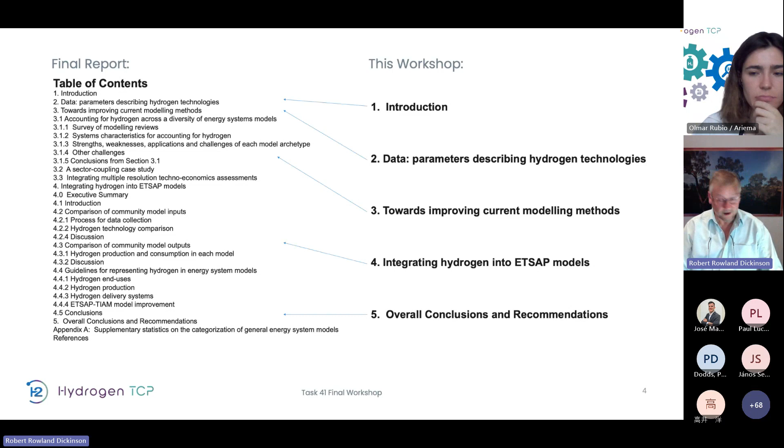I've got one slide to recap. What's been really interesting is that regardless of the original motive for Task 41, what we've actually observed is a very steep ramp in interest in modeling to do with hydrogen over the duration of 2018, 2019 to now. And it's not just academic modeling in the journals, it's also things like Electrify Everything in the US and Australia, and probably elsewhere too.

Hydrogen was integrated into Plexos in 2020, right in the middle of Task 41. Plexos is a major modeling tool by Energy Exemplar, used around the world. So we can't take credit for the increasing modeling interest, because it's happening anyway. In some ways we ended up having a hard time keeping up, given there wasn't enough work on modeling.

So just to recap the context, Paul already mentioned Task 38, which was Power to X, went from fringe to mainstream over the course of Task 38. It was quite similar to Task 41. So the notion of modeling hydrogen went from fringe in 2018 to becoming mainstream by about now.

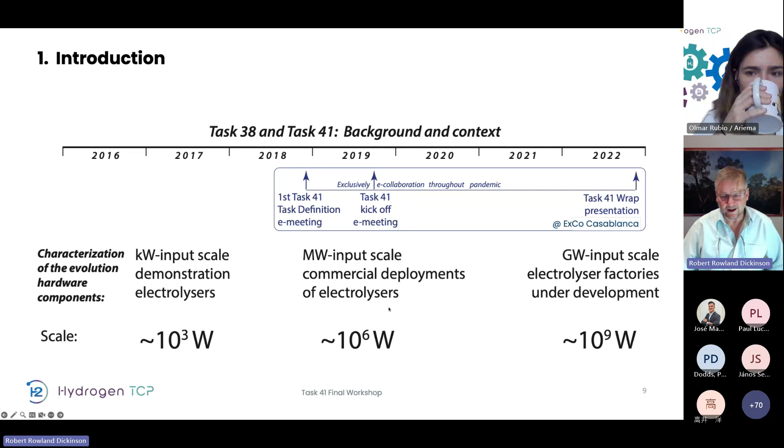Another way of characterizing it is in terms of the scale of typical electrolyzers. 1 megawatt is still the largest electrolyzer around Australia, which is in here somewhere, but they've been around for a long time. Megawatt scale is coming and gigawatt scale is just around the corner.

Another characterization of the Task 38, Task 41 context is IEA Hydrogen, the International Energy Agency, where the Hydrogen TCP and etc. TCPs sit underneath the IEA. They started getting seriously interested in hydrogen for the G20 in 2019, and then they started an annual global hydrogen review, which is now a major project reviewed by people all over the world.

So, just to recap quickly: Subtask A was about data consolidation. Subtask B was about improving current methods. And C is what Paul is going to be talking about.

I guess we'll do questions at the end. D was a review of reports from IEA, but really that was just a relatively small chunk of work where the IEA was doing their own reports involving hydrogen, led by Ali Lind, who was the task leader at that time. We provided some input to IEA's reports. So we made good strides, but we didn't get there in the end.

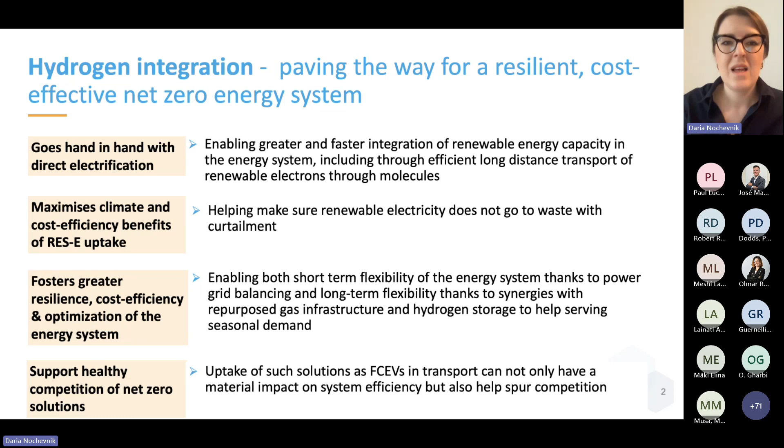Within the Hydrogen Council, we have undertaken work on modeling hydrogen integration in the energy system together with our colleagues and partners at Baringa. We used Plexos as the modeling tool, and we looked at three distinct regions with very different energy systems: Central Western Europe, Japan, and Texas in the US.

What we have aimed at doing is really to assess and quantify the impacts of hydrogen energy penetration across power, gas, and liquid fuels, using the latest iteration of Plexos that allows you to explore synergies between those three elements of the value chain in an integrated manner.

The insights I shared earlier are very much confirmed by this modeling and the analysis we have carried out across the three regions. We see that both energy efficiency, cost efficiency, and climate benefits are associated with greater integration and unconstrained performance, availability, and the opportunities associated with effectively letting hydrogen solutions such as electrolyzers be integrated in the system in an unconstrained manner where they're able to follow market signals, and that can unlock substantial benefits.

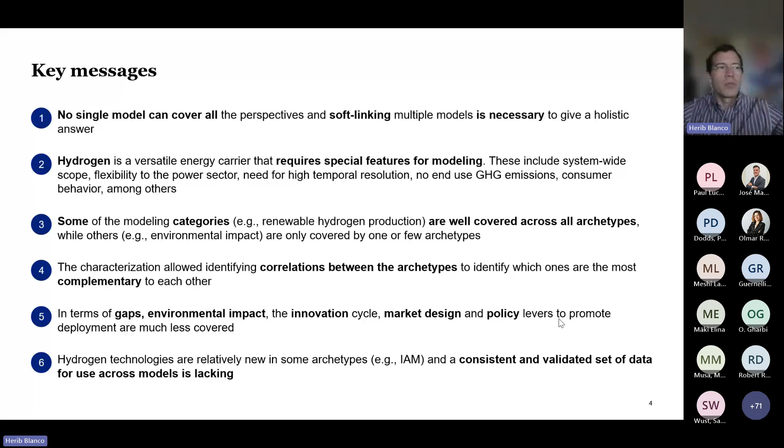So the longer version, again similar to what I explained, but giving more details. This is a taxonomy for any energy model. For this one, we reviewed almost 30 articles, a total of 127 categories, which we clustered into these six majors that you see. I'll guide you quickly through each.

One way to look at a model is its purpose. You could look at a normative scenario - what do you need to do to reach net zero in 2050? Or you could look at it in a forecasting or exploratory way, starting from today - what happens if I increase the carbon price to X, as an example. So, exploratory. But the main point is that depending on the purpose of the model, that already gives you a difference between one another.

The other is solution methods, around the analytical approach - for example, if it's top-down, meaning you start from the macroeconomy and then try to model the technologies, or bottom-up, where you have very rich technology detail but not so much of the macroeconomy. That's an analytical approach. Mathematical approach is just whether you have optimization, simulation, system dynamics - there are different types, and they lead to different answers and different insights. So that's another way of slicing and differentiating the models.

Use and accessibility is just because of the trend - well, not so recent anymore - of open modeling. So it's about whether it has transparency, licensing, and training.

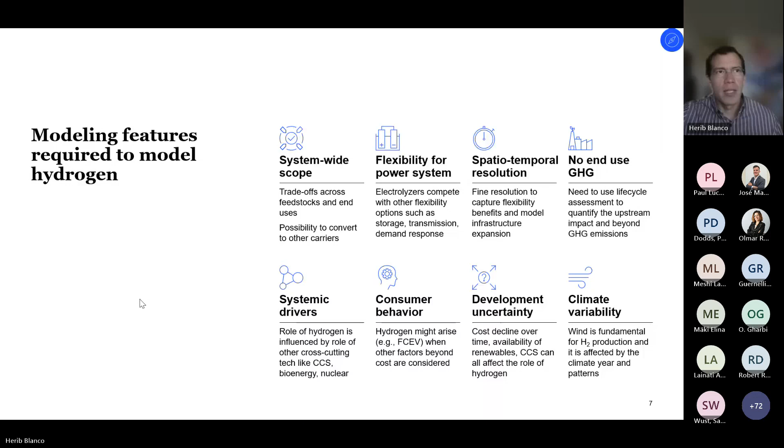And climate variability - at the end, one of the core technologies for hydrogen is the renewable pathway. Wind is there, and wind depends on the climatic year that you take. It can vary a lot from one year to the next. So that's another feature.

This leads me to adapting the taxonomy that we saw before to hydrogen would leave this.

One is spatial temporal resolution, key for hydrogen because of the flexibility in the temporal aspect, but also the spatial aspect. On one hand, you need high spatial resolution for the renewables potential to know where those renewables are located. The same for the infrastructure. You need high spatial resolution, so that's the reason to have that as a key category in the taxonomy.

Model topology, because of what I mentioned for the hydrogen derivatives and end uses, that's key because you only unlock the full potential of hydrogen when you consider the hydrogen derivatives. Those derivatives are the ones being traded, and trade is a relatively big part of the hydrogen potential. So that's important, the importance of the model topology.

Complexity - I think I already mentioned all those aspects. So it's important to have those to look beyond cost optimization.

Perhaps another angle I haven't mentioned is that part of the complexity, again going beyond cost optimization in trades, is geopolitics. You will not look at country X just because of the cost and export potential or even the land area. When you look at country X, it depends on the industrialization, the political stability, the renewable development, and so on. So my point is that's something that goes in this complexity category as a way to characterize models and the methodology.

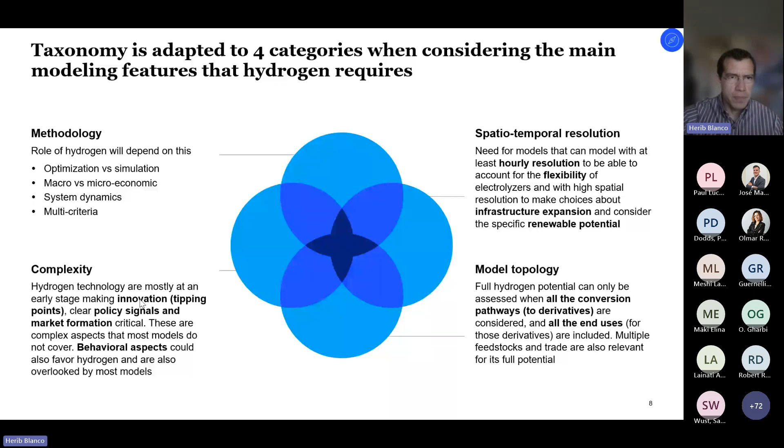So looking at the archetypes for hydrogen, we identified 9. We had more archetypes, but we narrowed it down to these 9 core archetypes. Let me guide you briefly through them.

Starting, the way to see this is, I would say, kind of Venn diagrams is what we try to show here. The smallest one is if you look only at one electrolyzer, one renewable plant, and try to optimize the size of those. That's what we call here VRE integration, so just very small scope.

Then you could expand that to the entire power system, include some other generators beyond wind and solar, the demand beyond electrolysis, and then you have a power model. But that has a limitation of relatively simple representation of other sectors, even when you see Plexos and the new Plexos with gas, it has very limited scope for transport, for example, for aviation, for shipping.

So it's still limited. Then you could expand it to an energy system model, including the other sectors, but then you start making trade-offs related to the question that was posed in the chat. The trade-off there is you expand the scope and cover more end uses, but you probably have to compromise a bit the temporal resolution because then you have a wider set of technologies.

There are energy system models that have hourly resolution and cover all the sectors, but then you might compromise on, if you're doing operational optimization or capacity expansion, for example, the geographical scope or geographical resolution. You could expand further scope and do integrated assessment models, so include things like the carbon balance, the climate, land use. That's a wider scope, but then again, those have even coarser resolution, and you might have issues of modeling seasonal storage, for example, which is one of the business models for hydrogen.

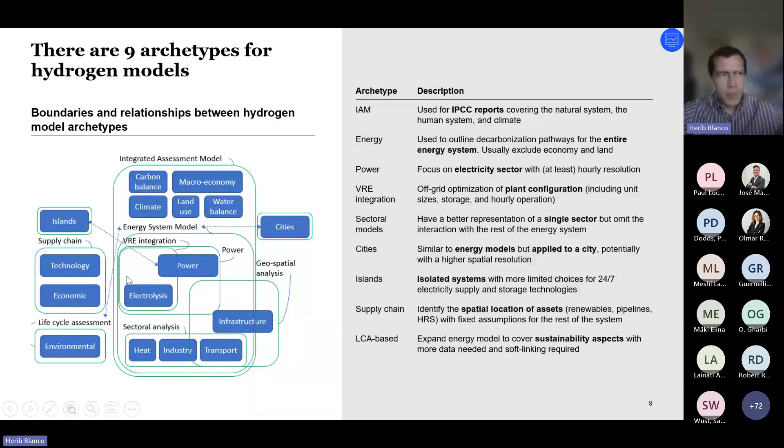I'll take probably like 5 more minutes, and I think I'm still on time, but let me know if that's not the case.

Here it's kind of an overview of part of those trade-offs that I mentioned and advantages and challenges of each one. So integrated assessment models are the ones used for IPCC. There historically has been a lack in the role of hydrogen there, just because of the update cycle. And even in the recent AR6, the role of hydrogen is still smaller than from other international organizations. So there the advantage is, yeah, it covers everything, but because of this update cycle, it doesn't consider many of these end uses, and not all of them.

And again, particularly for the derivatives and trades, to unlock the full hydrogen potential. For energy, I already mentioned the trade-off of temporal spatial resolution because it's expanding in the scope. For power, the advantage is that it captures the flexibility, but the disadvantage is that it's focused on power, so you're missing the rest, and hydrogen needs the rest. It's a cross-cutting energy carrier.

Perhaps not to go through each of these. Another important one is perhaps the last one, the environmental analysis, just because that's a community where there are lots of studies looking at the LCA impact, but not many with the integration. And there, something key is the inventory for the environmental impact assessment, and having consistency with the energy model. So for example, part of the inventory is electricity use and what's the footprint for the electricity use, even for example, for the concrete that you use in the electrolyzer, that's called background.

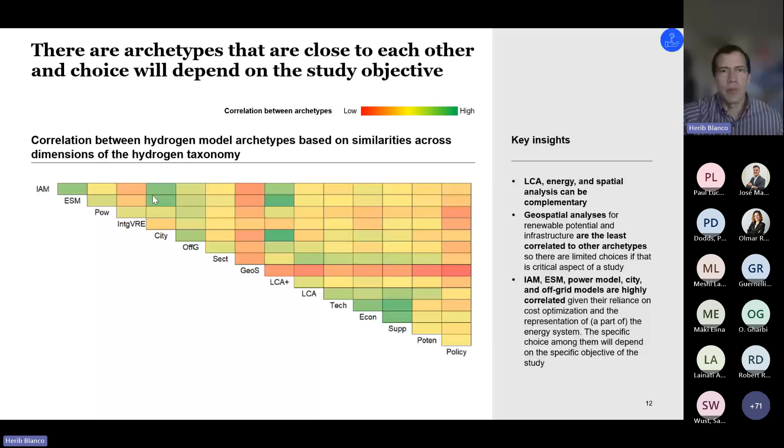And the last one is just to mention that this was a team effort, so thanks to all the team. I think I saw a couple in the call. I was the lead author, but by no means the only one. So just to thank the entire team for the contribution. Thank you.

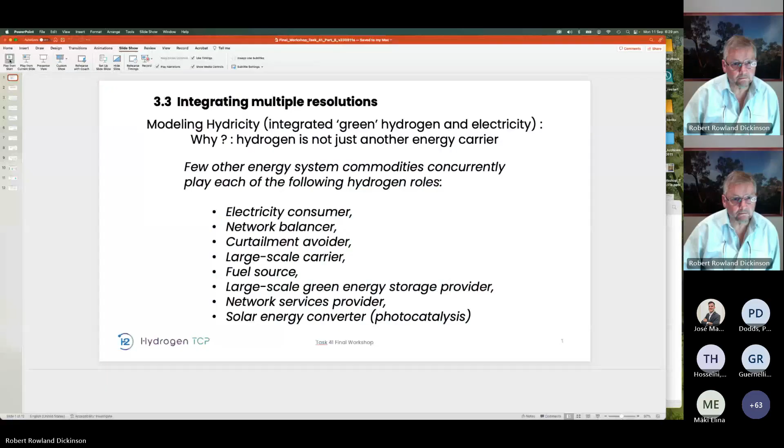Yeah, thanks, Herib. I'm going to go fairly quickly through these because we're a little bit late on time after many presentations. But all of this is in the final report, so if you want to look it up and send me an email if you have any questions, that'd be cool.

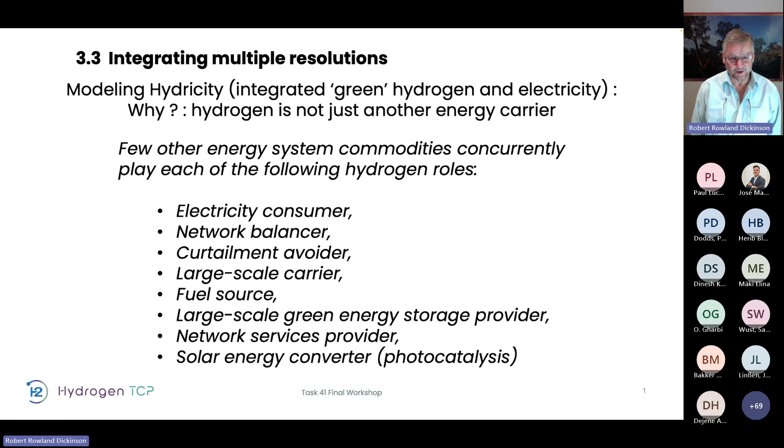So I use the word hydricity to refer to integrated green hydrogen and electricity. And why hydrogen? It's not just another energy carrier, it's all sorts of other things - an electricity consumer, network balancer, curtailment avoider, as our Indian colleague pointed out just now in the chat, a large scale carrier, a fuel source in the sense of providing fuel to fuel-consuming services, and so on.

But as one of the things that Herib pointed out is the need for a soft coupling of different systems - that's one way of putting it, but I'll be referring to that at the very end of this short presentation. So ideally, it gets interesting to look at dispatch interval time resolution while maintaining computational tractability. So I reckon we can have our cake and eat it too.

What happened? So picking on South Australia as a region with a capital R within Australia's national electricity market. It's where I live, but it's not why I'm presenting it here.

I'm presenting it here because it's the world's best example yet of a market that is already suffering from - if you like to put it that way - or benefiting from, if you like to put it the other way, very high proportions of variable renewable energy, so wind and solar. This is what's happened in the last decade - it's getting close to providing enough wind and solar, actually to backtrack a little, the state government wants to get up to about 500% variable renewable energy by 2050 and sort of 200% in the 2030s.

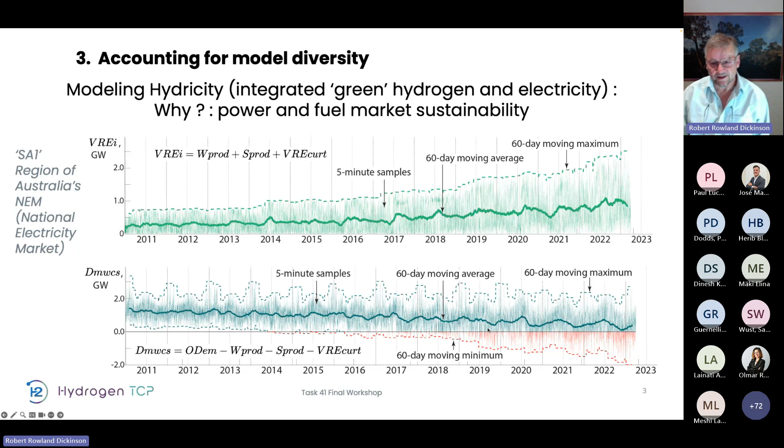So demand minus wind and solar, the bottom graph here presents the interaction of both demand and wind and solar production. As you can see, we're getting more and more negative values - that's very low demand in sync with very high varying production.

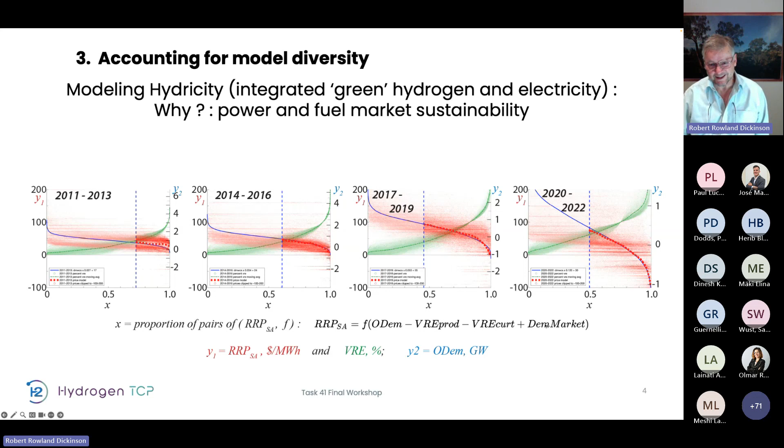So the question I posed is: can you model price as a function of all these different complex things? And the answer is yes. Over a 3-year period, obviously it changes over the long term, but over any 3-year period there's a good shape match between regional reference price, RRP, and all of these other 4 independent variables: demand, production (that's wind and solar production), curtailment, and eventually demand market - that's where we get particularly interesting.

If you look at the history of demand modeling and price modeling, until 2010 there was no significant wind and solar production, so RRP was a clear modelable function of demand. Then it became increasingly dependent on varying production in the early 2010s, and then production plus curtailment in the late 2010s. The extension of that is: can we add a demand market to operational demand?

So demand market means any energy consuming service that is able to respond to price, to buy or bid into the low price markets. The obvious one is electrolysis.

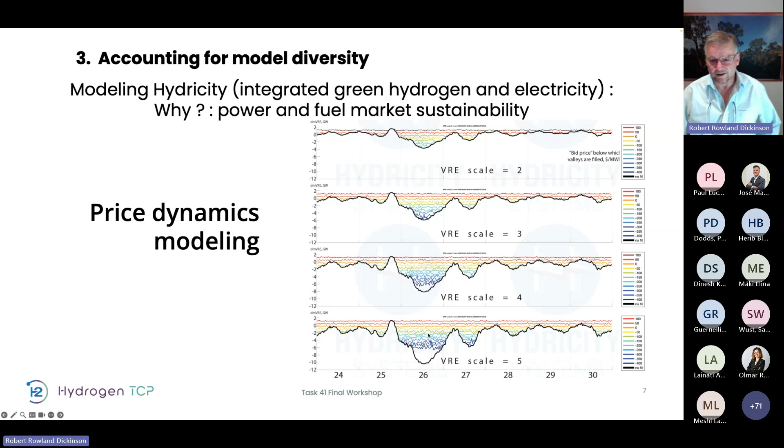So yeah, this just works. Obviously things fall over if you've got nothing but negative prices. But if you fill all these negative - from top to bottom this is scaling, you could think of this as 2028, 2032, and all the way down to 2050, and everything else is the same - you've got increasing opportunity to buy or to bid, if you like. This is the price at which these energy consuming services are buying electricity.

So this is the crux of it. Price dynamics modeling clearly shows that anything below 0 is obviously not sustainable - the energy system, the market falls over. So there's no free lunch. You need to have a bidding process to push all these prices up, and then everybody wins if you have a bidding process.

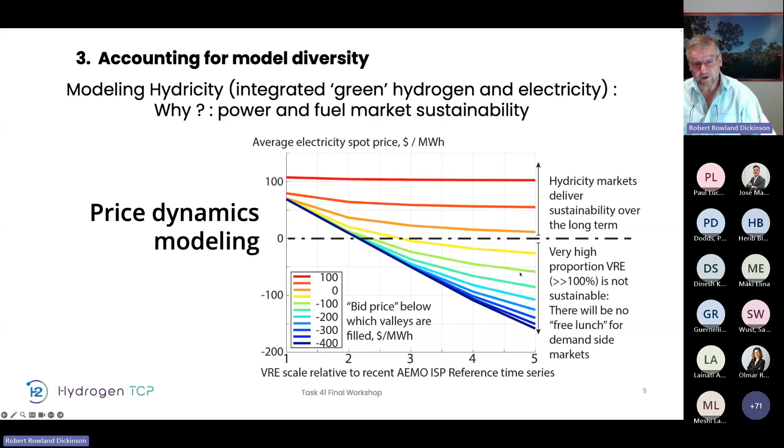This is why I'm alluding to a 10-year period - we're roughly here right now, 2030s in here, or 2032 in here. So roughly a 10-year transition period, where the history of electricity markets around the world - most of the people I saw in the attendee list are from Europe, obviously some from India as well, which is cool.

But everywhere around the world, probably India as well, the bids are stacked in order of lowest dispatch first and highest last. So if you're a coal plant, you always bid at the lowest price because you know you get in no matter what the price ends up being. But if you're a high price bidder, you can choose not to go in too low.

And it's the other way around - if your bids are stacked in order of highest dispatch to lowest last, if at all, then the demand side is being taken care of by balancing out all of these things. So for me it's fundamentally obvious that that's the way we're going to go. You can think of it as fuel to power and power to fuel. It's fundamentally obvious that as we go from fuel to power, where the fundamental cost of electricity is fuel, here the fundamental cost of fuel is power, and we need to flip things around.

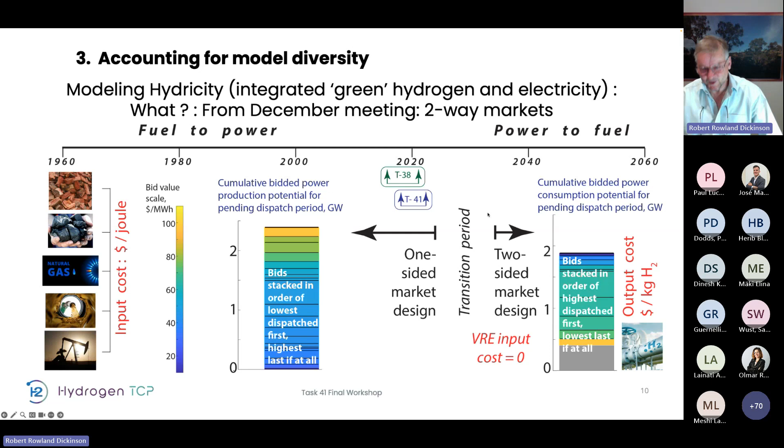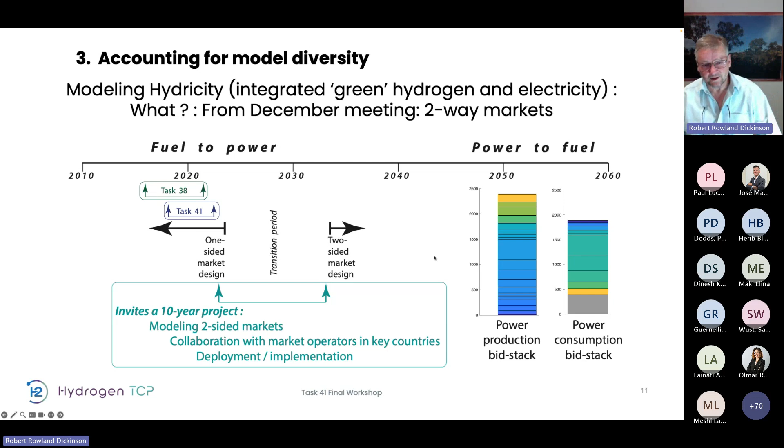So I just suggested that it screams out for me to have a 10-year modeling project where we start out modeling - you don't actually implement it yet, but start modeling two sides, a power production stack and a power consumption stack running side by side, and that's not rocket science.

So yeah, once you have that - all of that was based on 5-minute time steps. This top row here is 5-minute time steps, 5, 10, 15, and these are decades or whatever it happens to be, like the model that Paul's going to be talking about in a moment, or anything that has a decade or a 1-year timestep. It shouldn't be too hard to arrange to have the benefits of 2 or 3 modeling systems at once.

So I got a bit of a break here, but maybe Olmar, do you want to do a break or do I go straight into Paul?

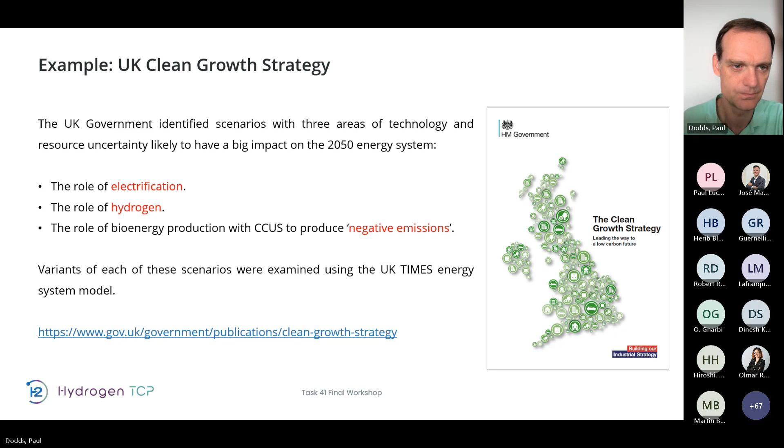Now, these models are useful because they represent many supply chains. We start off from resources on the left, we end up with energy service demands on the right-hand side. We have a number of different technologies in the middle that process primary commodities into secondary commodities, so gas into electricity, for example. And then we deliver those, whether it's through wires or pipes or by road.

We have a series of different demand technologies in different sectors, and these models cover the whole economy, which is really important, to try to cover all emissions across the whole economy for energy. So your demand technologies might be lights, boilers, cars, and such like, that meet actual demands for things that we want in real life. Now, this is a very simplistic diagram.

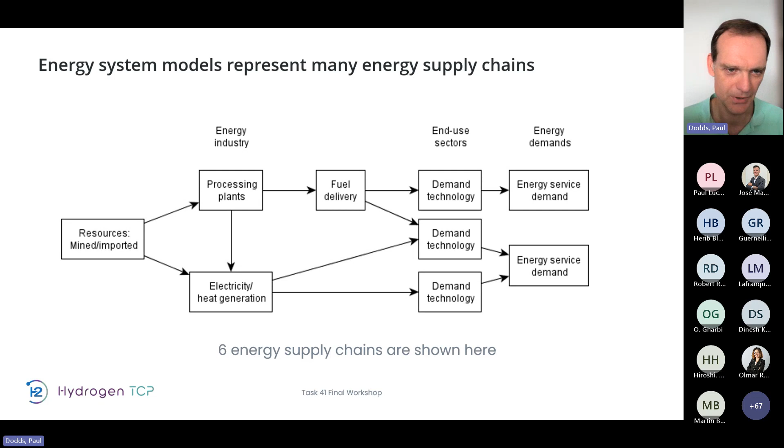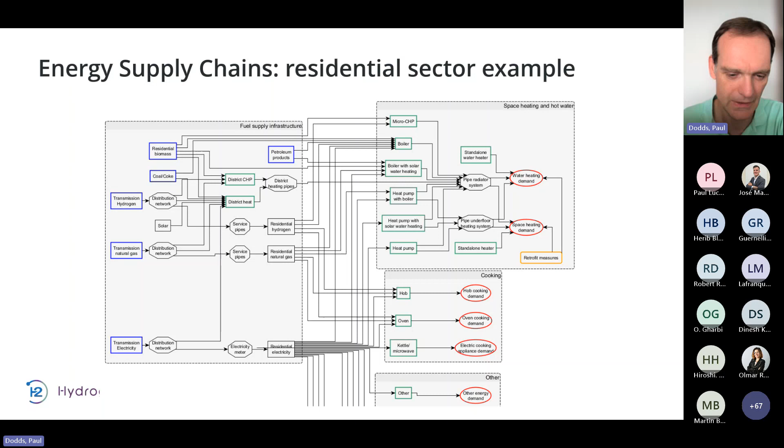In practice, this is also a simplified diagram for the residential sector. You'll see that we have a lot more technologies represented here, and we have infrastructure as well as energy production and energy consumption and demands.

And then once we get into the whole model, it becomes really complicated. In a typical model, you might easily have 1,000 different technologies represented, say a few hundred commodities of different types, in order to meet say 50 demands across the economy, while counting all greenhouse gas emissions and minimizing them over time.

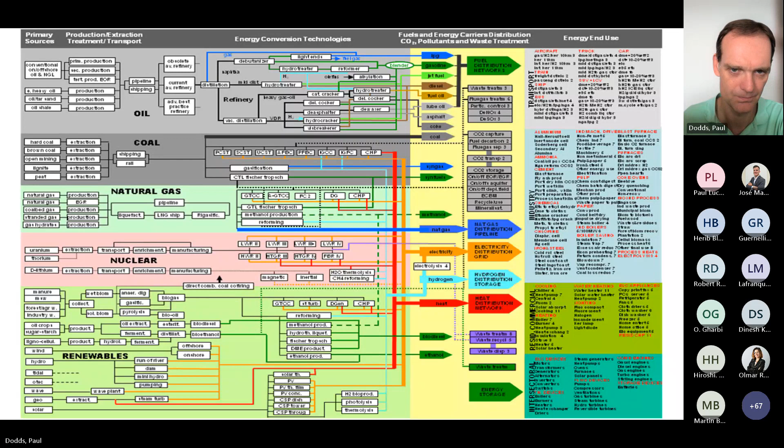So I want to just mention why we did this project in the first place. There was a question we had, which is why was there so much variation in the use of hydrogen between our energy system models? We had concern within the ETSAP community. ETSAP is the Energy Technology Systems Analysis Program, which is another IEA technology collaboration program. We had concern within the ETSAP modeling community that there was quite wide variations in both hydrogen supply and demand between the various models that people were using.

And many people have different national models in particular. We didn't know why this was. We didn't know how large the variations were, because nobody had ever really looked. This was just something that was more like hearsay.

Now, if there was variations, and we assumed that there was, based on conversations we had, we didn't know if these were caused by local variations. So simply the local energy systems are different, the types of demands are different, the resources are different, and therefore it made sense to have use hydrogen in some places and other approaches in others. So that would be very normal, very proper thing to do.

Or was it because some or all of the models didn't represent hydrogen properly? In which case that was an issue with our modeling rather than an issue caused by the real world, local variations in the real world. And that would be a big issue that we'd need to deal with in our models.

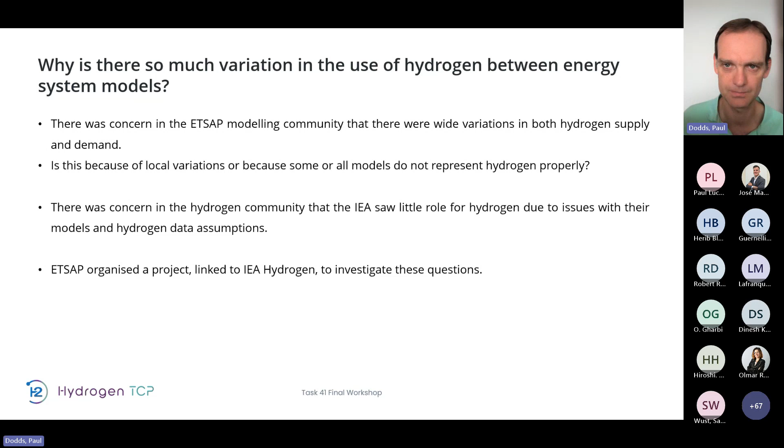So in our discussion today, I've just introduced energy system models, and I'm going to talk about the comparison of model inputs we did, which was a survey that took place in 2019. I think now that we're in 2023, that's an important thing to say, because many of these models have improved their modeling of hydrogen since. So I certainly don't want you to take this as the current status of all of these models. Some have changed since 2019 - some will have changed a lot, some a little bit, and some not at all.

We'll also, I'm then going to talk about model outputs, which we also did a survey for at the end of 2019 into early 2020. And then I'm going to finish by talking about making some suggestions for best practice modeling of hydrogen going forwards in these models.

So the first step was to look at model inputs. How do we represent hydrogen energy systems in existing models? And what are the strengths and weaknesses?

We asked each modeling team to fill in a spreadsheet that listed what they assume within their model, along with a diagram of the hydrogen part of the model itself. By assumptions, I mean what end uses are assumed, what types of hydrogen delivery and infrastructure options are included. For production, delivery, storage, and end-use technologies, we asked them to list each type of technology and provide input data, including how that data varied over time.

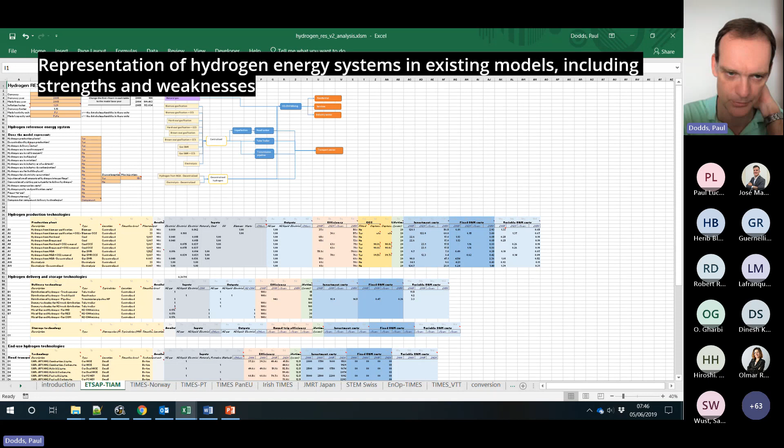So we really got into some detail here. That input data included when the technology was first available, what plant size would be modeled, the capital costs, operating costs, efficiency, and lifetime. There was quite a lot of data collected, and of course not all models used all these types of data, so it was flexible for the teams to fill in. We did this for 10 models.

This is the list of the 10 models on the left-hand side. The scope tells you the geographical scope of the model. ETSAP-TIAM is a global model, Times Pan-EU is an EU model, and the other 8 were national models, primarily in Europe, but also Japan.

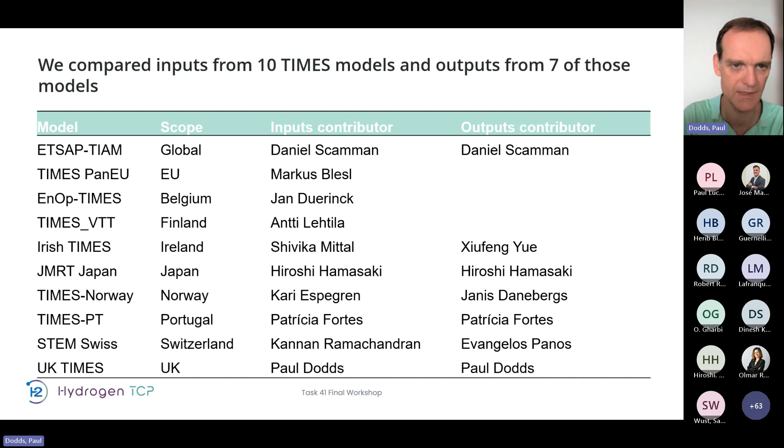For all 10 of those models we had some inputs provided, and for 7 of those models we also had outputs. So let's talk a little bit about the inputs.

We start off with transport, because historically hydrogen was focused on transport. We thought this was the area most models were likely to have a role for hydrogen, if they considered hydrogen at all. 90% of models considered hydrogen use in road transport - only one didn't, and that's because EnOp-TIMES is a specialized industrial model, not a whole energy system model, so there was no transport sector. Otherwise every model considered hydrogen in transport, which is what you might expect.

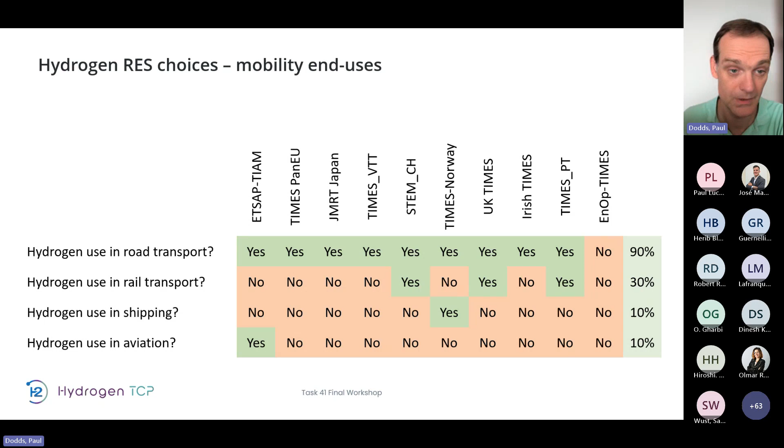When we look at rail, shipping, and aviation, there was much less coverage. In fact, there was only one model each for aviation and shipping, and they're different models. I think that will probably start to change soon, if it hasn't already, but that was the case back in 2018, 2019, when we collected the data.

For road transport, two key issues for hydrogen are that very high pressure hydrogen is required to transport the fuel in fuel tanks. We often look at 700 bar transport, meaning compressing the hydrogen to about 850-900 bar at refueling stations. We also need very high purity hydrogen so it doesn't poison the PEM fuel cells, proton exchange membrane fuel cells, used by most vehicles.

We were interested to see if the costs of compressing and purifying hydrogen for the road transport sector were included in these models, and actually they were in most of them. I haven't included EnOp-TIMES here since it didn't have a transport sector, but 7 of the other 9 models did consider compression costs, and 3 of the 9 considered purification costs as well. These can be substantial - even with hydrogen from on-site electrolysis, you can lose 10 to 15% of the energy to compress and purify the hydrogen to the required level.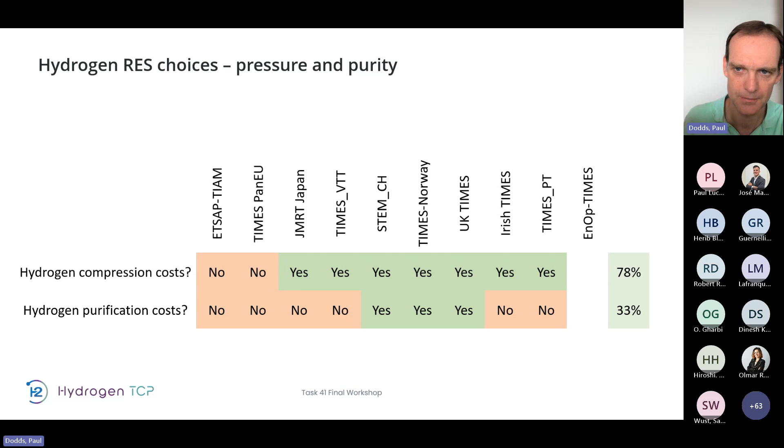Then we looked at a number of other uses across the energy system outside of transport. You'll see some big gaps in the middle because we did this in 2 steps. We first asked teams to provide their inputs, analyzed those, and then discussed them at a workshop at the International Energy Workshop in Paris, I think in 2019. As a result of that discussion, we identified 4 areas where people did model uses of hydrogen that we hadn't originally asked about. We added those afterwards, but not every modeling team got back to us, so that's why we have gaps in the middle for those 4 areas.

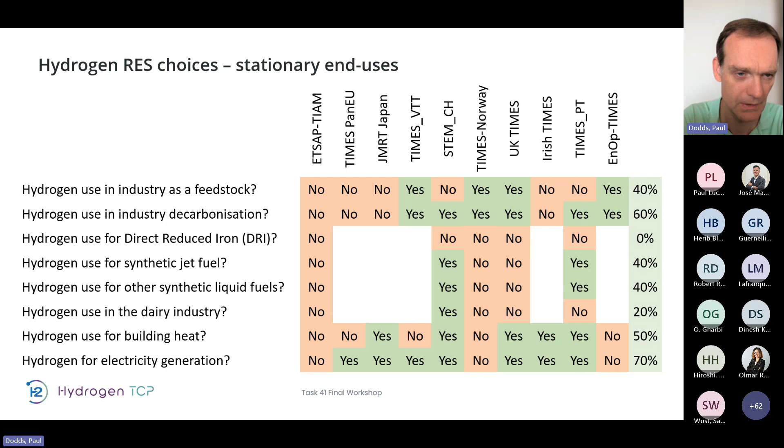So we looked at hydrogen use in industry as a feedstock, or for decarbonization more generally, for example in boilers, and also for direct reduced iron production. We looked at synthetic jet fuel, other synthetic liquids, dairy industry, building heat, and electricity. It varied quite a lot - quite a few models represent hydrogen use for electricity, and some for industry, but the others are quite patchy.

We also looked on the supply side. Do they include production plants? All but one, yes. Do they have decentralized hydrogen production? All but one. We looked at different types of delivery routes—do they actually have any hydrogen infrastructure, or do they just assume it's produced and then goes straight to the end use?

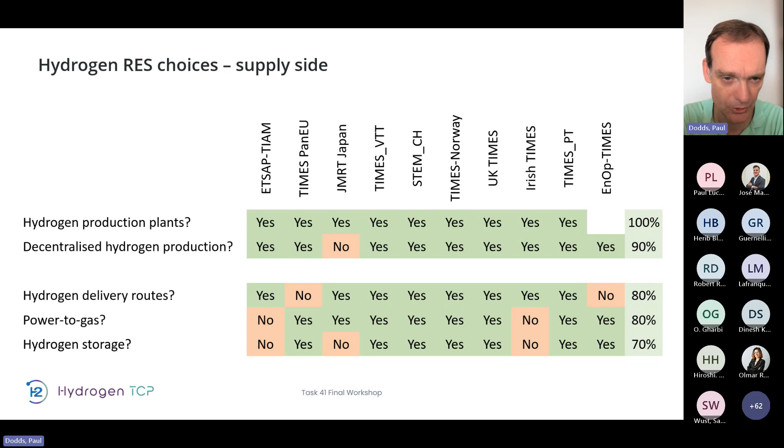Two of them didn't have any delivery infrastructure, but the rest did. We asked about power to gas—could you inject hydrogen into the gas supply? A surprisingly high number of models allowed that, 8 out of 10. And could you store hydrogen? 7 out of 10 have hydrogen storage.

Where you could inject hydrogen into the gas supply, we asked what percentage of hydrogen you're allowed, and that varied quite a lot, between 2 and 15%. In a couple of models that's erroneous, because you can't practically put more than 6% in, which is about 20% by volume, without changing all your end use devices—boilers, cookers, and everything else. So 6% is a practical maximum. After that, you'd probably jump to 100%.

We did ask whether you could convert existing gas networks to deliver hydrogen, and 3 models allowed that, and the rest did not. Of course, in some cases the countries had very limited or no natural gas networks, so it wasn't really an option anyway.

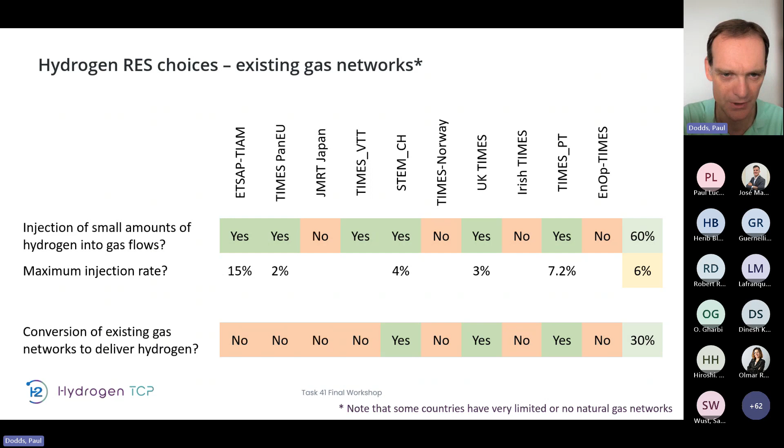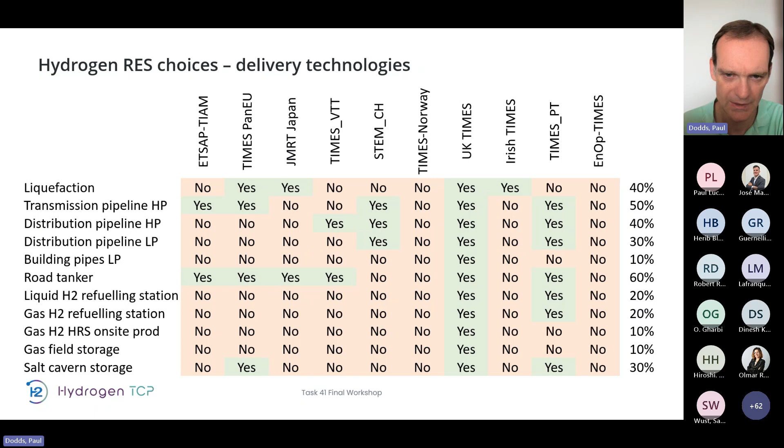We asked about the various delivery technologies, including liquefaction, pipelines, road tankers, refueling stations, and storage. The amount of hydrogen delivery and storage infrastructure varies quite widely between models, but it's much patchier than end uses was. There are some technologies, such as gas field storage, on-site production of hydrogen, or refueling stations, where there's only one model representing these.

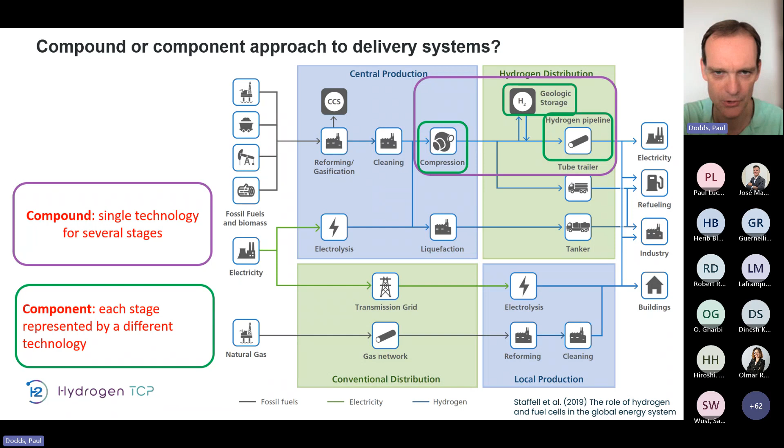For models that did represent these types of delivery technologies, we asked how they did that. There are a couple of methods used. Some used a compound technology, defining a series of supply chains, and each supply chain had a number of technologies in it to compress, store, and deliver the hydrogen, such as the one shown in the purple box here. Other models took the approach where each component of the supply chain was represented by a separate technology, and they could be mixed together as the model found appropriate, shown by the green boxes here.

And there was a mix between the two—two models used only components, two models used only the compound approach, 3 used a mix of the two, and 3 models didn't provide any information about that.

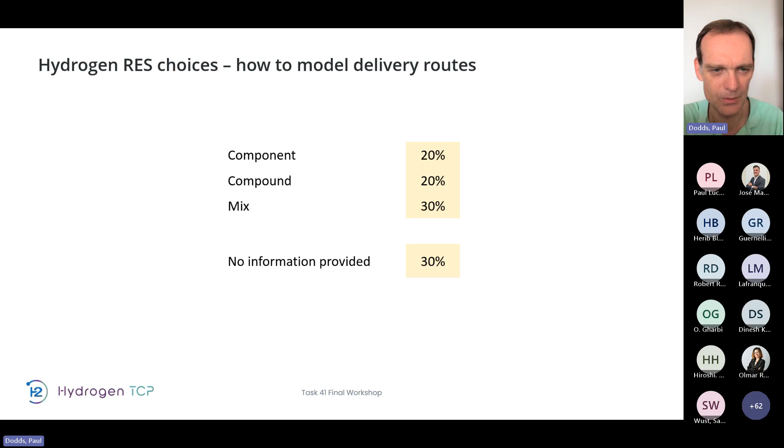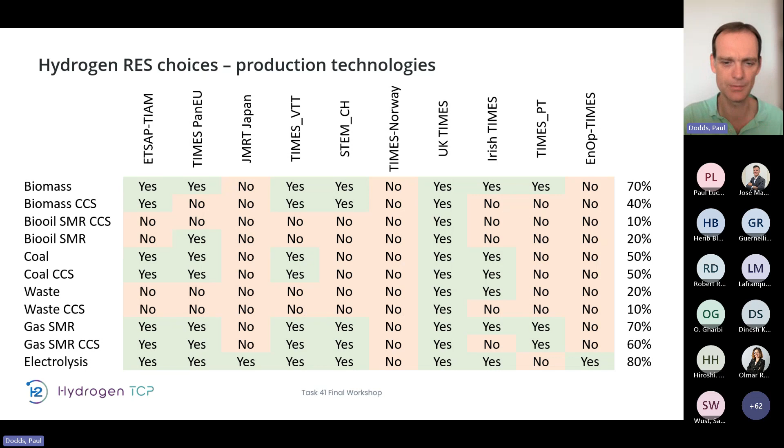Finally, we asked about production technologies—which ones are in models—and this also varied quite a lot. It's probably not a surprise that most models had electrolyzers in them, and I think the 2 that didn't here have since had them added. There's also quite a large number that have gas SMR and biomass. But once we started looking at the CCS technologies, bio-oil, waste, and such like, very few models have these included. So they're much more variable beyond the basic set of technologies.

So the conclusions we came to: first, the level of modeling detail varies widely. Most models contain a basic set of technologies, but some of the more exotic ones were considered in very few models. Modeling the delivery technologies is particularly difficult—we can tell that because there's much diversity between models.

We have to keep in mind that production costs are normally much higher than delivery costs in most locations—though you have to be careful saying that, since it depends on your delivery mode and local geography. But that means for most models, if you capture the cost of production, you're capturing most of the cost of the hydrogen. So while we found that most models consider delivery systems, few offered a really wide range of different delivery systems. We were quite surprised how few models considered pipelines, actually. I think that's starting to change.

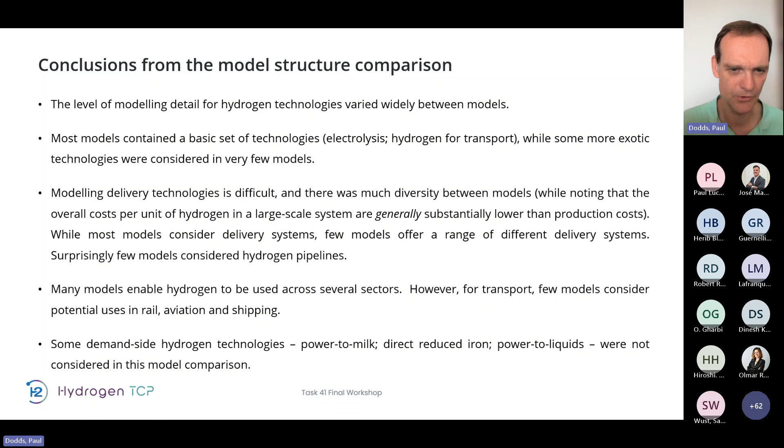Many models allowed hydrogen to be used across several sectors, but few considered the transport sector and uses outside of road transport, for rail, aviation, and shipping. A number of demand-side technologies were not really considered in the model comparison, and we found very few models that considered any of these technologies.

So some questions were arising. First of all, would we benefit from disaggregating some technologies within the model in future, particularly electrolyzers, where we see different types of electrolyzers being used for different applications in the real world?

Should we try to have a more comprehensive coverage of hydrogen production technologies across the models? Should we have a much broader focus on hydrogen-based compounds as well as hydrogen, such as ammonia and liquid organic hydrogen carriers? These are not generally considered by energy system models, but there's an emerging view that trade in these types of compounds might be quite likely in the future, international trade. So that's something we should be considering.

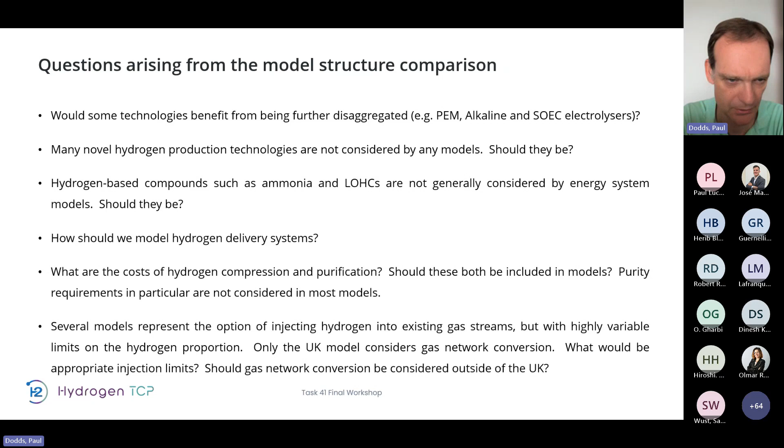There are questions about how we model hydrogen delivery systems. What are the costs of pure hydrogen compression and purification, and how should we represent these in the models? And finally, on injecting hydrogen into existing gas streams and on converting existing gas networks to use hydrogen.

Now I want to talk a little bit about the outputs. For the outputs, we asked each team to provide hydrogen output data for two scenarios from the model. The first scenario was a typical optimal scenario, which maximizes model flexibility essentially, but it's the base scenario of the model minimizing cost, to see how much hydrogen would come in the base run, the lowest cost run.

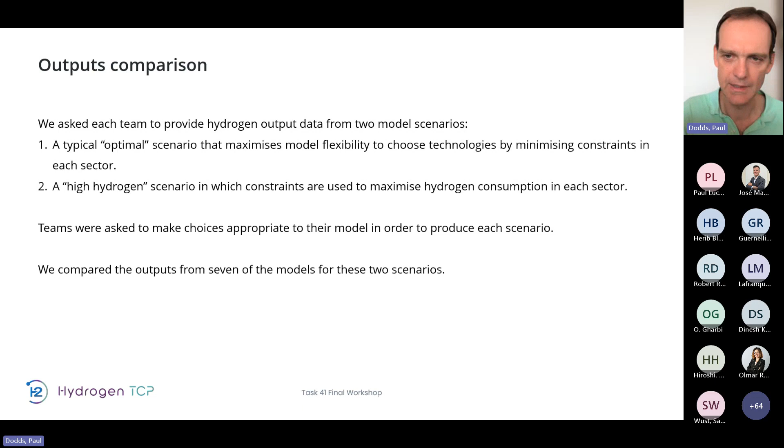The second scenario was a high hydrogen scenario. In this scenario, we asked the modeling teams to put in additional constraints on the optimal scenario to maximize hydrogen consumption across the economy, and we asked them to make their own choices about what they thought was appropriate in the model to produce each of these scenarios. We had input from 7 of the models for these 2 scenarios.

So this is the list of the total hydrogen production in each of the scenarios. Now you'll see that a couple of the models have 3 scenarios, not 2, and that's always the case when you're trying to get academics to do something. There's always a subset who will never do what you ask for, or exactly what you ask for. But we were able to interpret those scenarios in one of the 2 previous categories.

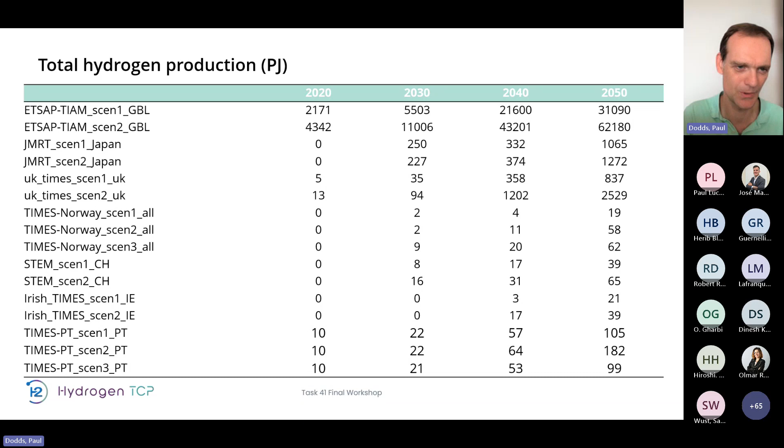Now you can see that total hydrogen production varies quite a lot between scenarios, but that's kind of meaningless because we have quite different sizes of energy systems between these models, as they represent different geographical locations and different numbers of people. So a better way to look at this is in terms of hydrogen production per capita, and that's what we do here.

That was really interesting for us because, I'm not going to go back to show you, but those 2 models had the highest number of end users available. It suggested to us that by adding more end users, there were greater uses of hydrogen, and hence in many of the other models, because they had a limited number of end users, they effectively weren't finding the optimal energy system. There likely would have been a higher use of hydrogen within the scenarios in the other models if they'd allowed more uses to actually happen, but they hadn't done that. So that suggested there was an area of further model development that would be valuable here.

This is a graph of how much hydrogen there is over time from 2020 to 2050 in each of the models. Remember, we started this before 2020. This is all normalized to the amount of hydrogen that's used in energy in 2050, so this gives you an idea of how quickly the economies ramp up before 2050. You can see it's quite varied, particularly in 2040, but still in 2030.

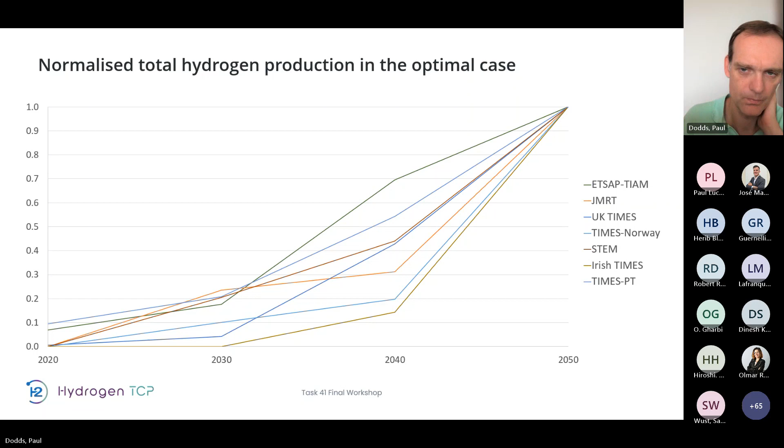Given time, I'm going to move on a bit. The next graph shows the fraction of hydrogen production from electrolyzers over time. Now, there are several models that use only electrolyzers, but not necessarily through the whole time horizon. And there's one model, the UK Times, that didn't actually use any electrolyzers, I don't think, or very little.

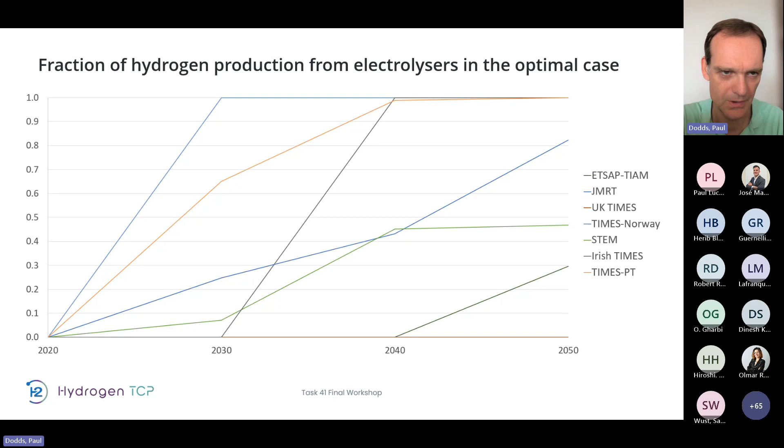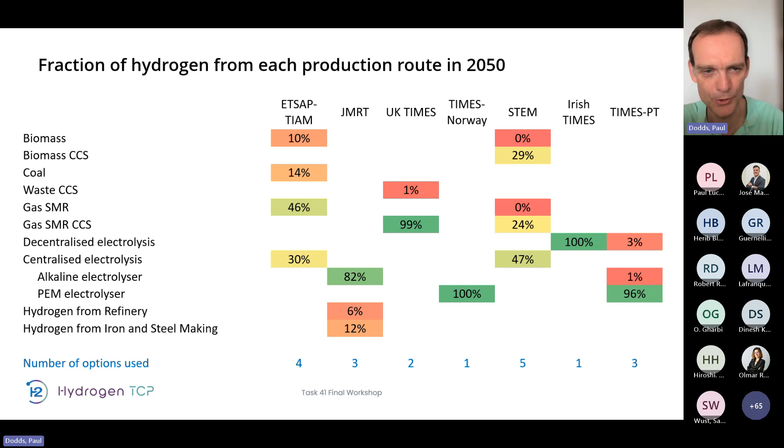So this is all quite varied. There wasn't really a clear trend. If I look at the fraction of hydrogen from each production route in 2050, interestingly, 4 of the models have almost all production from a single technology. The JMRT has most production from electrolyzers, with a little bit of leftover stuff from industry. The remaining 2 models have quite a wide mix of technologies producing a broad portfolio of hydrogen, 3 or 4 technologies. So quite different behavior between models there.

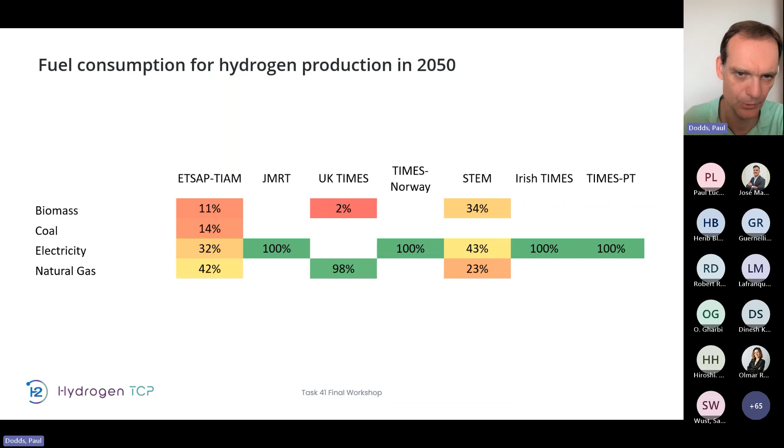On the consumption side, you can see there's a number of models that focus primarily on transport, but some do focus elsewhere. JMRT, the Japanese model, focuses on residential and services, actually, primarily for heat. UK Times has a mix between industry, electricity, and services primarily, with only 2% used in transport. So it's quite different - those two models are unusual in having a very small transport component, and they assume that transport's primarily electrified. Other models, such as Irish Times, have 100% use in transport. In general, most of the uses across the models are between industry and transport, though.

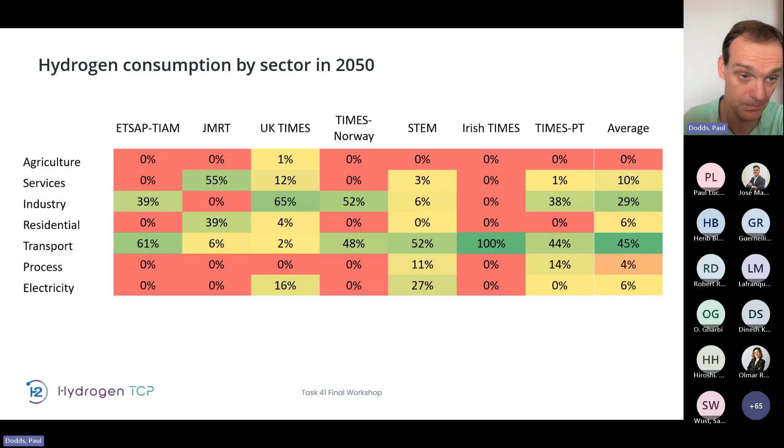Within the transport sector, some models focus on heavy goods vehicles and buses, while some have quite a mix between various areas. The global model actually mainly uses it in aviation. The Japanese model mainly in cars, and then the rest are a little bit more mixed.

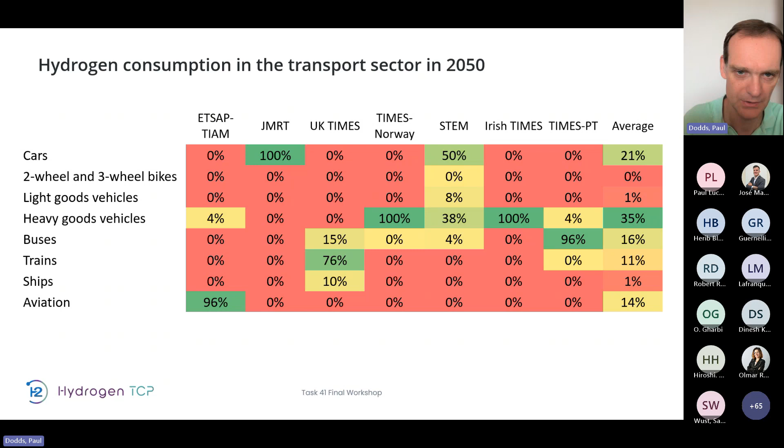So I want to finish off by talking about methods of representing hydrogen in energy system models. First of all, we have to accept that not all hydrogen is equal. It can be delivered as a gas or a liquid. The gas pressure can range from a bar to 850 bar at end use, purity from 75% to effectively 100%. We can mix it with natural gas. There's a number of hydrogen-rich compounds. So we talk about hydrogen, but there's lots of different types and grades of hydrogen that maybe we need to start thinking about within these models, because these models normally just consider hydrogen as a single concept, a single type of commodity.

We need to think about what level of complexity in the representation of hydrogen is appropriate to a particular model. In the boxes on the right, a full detailed hydrogen system might be very large, but a typical model is likely to be smaller than that. The global model is likely to be even smaller because it's got so much of a broader scale - it's not feasible to do very high detail and resolution on a very, very large geographic model normally.

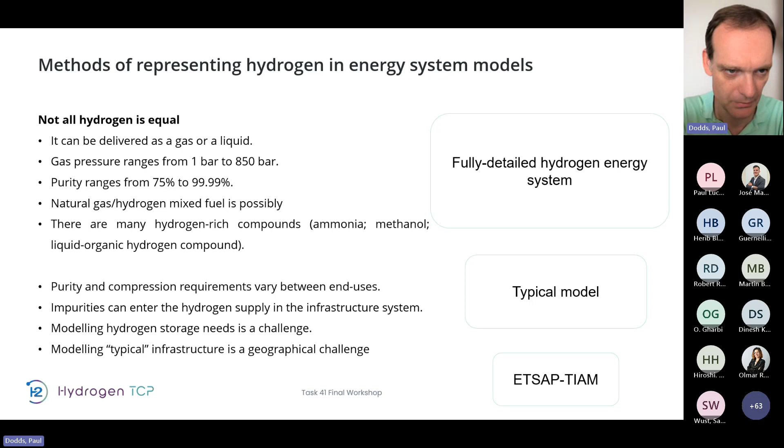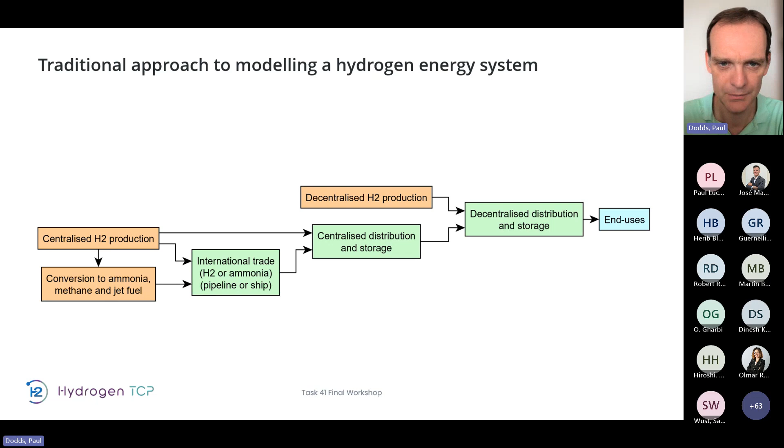Within these models, we have a traditional approach of modeling a hydrogen system where we produce the stuff centrally. Maybe we convert it to ammonia, methane, or jet fuel. We then trade it, distribute it. Then we have decentralized production and storage if necessary, and it goes to end uses.

But in reality, production looks quite complicated. This is an output from an infrastructure planning model for the UK, showing how infrastructure might develop over several years, trying to represent all of the various types of pipeline, pipeline length, and cost and such like. In a model without spatial resolution, such as UK Times, which is a single region model, this is very difficult, and getting those costs looking sensible is very difficult. We have to keep that in mind.

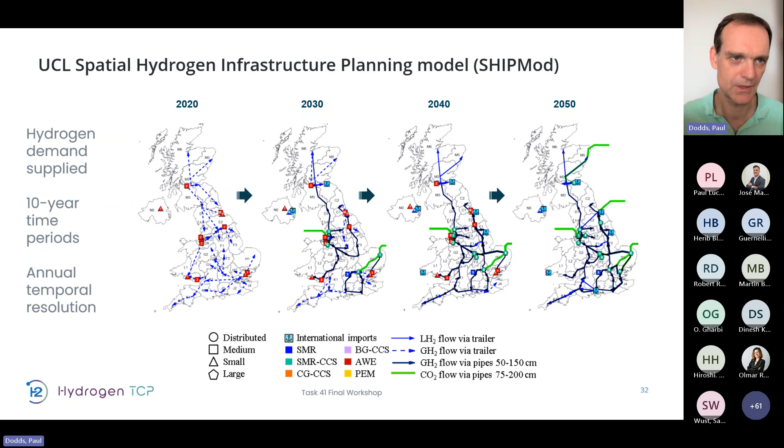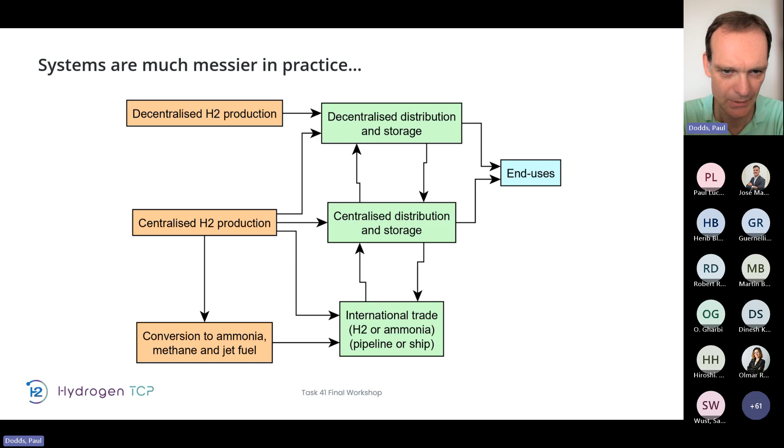And even in practice, we have decentralized production and centralized production, which both contribute to end uses, and the hydrogen from each can be mixed with the other one. So it's much messier.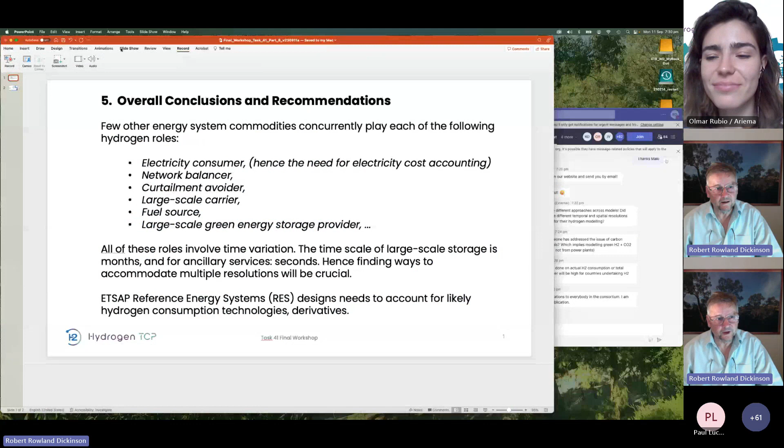Here we go. Many thanks, Olmar, and thanks to Paul and your crew. It's a pretty amazing collection of work. It's a lot like the opposite end of the spectrum of what we did in the entire task, relative to what I presented, which was just focusing exclusively on electricity and hydrogen, electricity and electrolyzers.

So just to conclude and hopefully invite some last minute questions, the crux for me of what's interesting about hydrogen is that there's nothing else that can do all these things: electricity consumer and network balancing, which go together hand in hand, and curtailment avoider, which is more of the same in some ways. Large scale carriers, so you put hydrogen in ships as a fuel source. Coal is a fuel source, but hydrogen can do all these other things.

And as a large scale green energy storage provider. All of these things involve time variation. The time scale of large scale storage is months, and as Paul pointed out, the time scale of some of the ETSAP models is 16 slices per year. That's fairly coarse. But for ancillary services, you get down to seconds. The dispatch interval is 5 minutes, but ancillary services is even sub-seconds, to respond quickly to network hassles. So how do we deal with that?

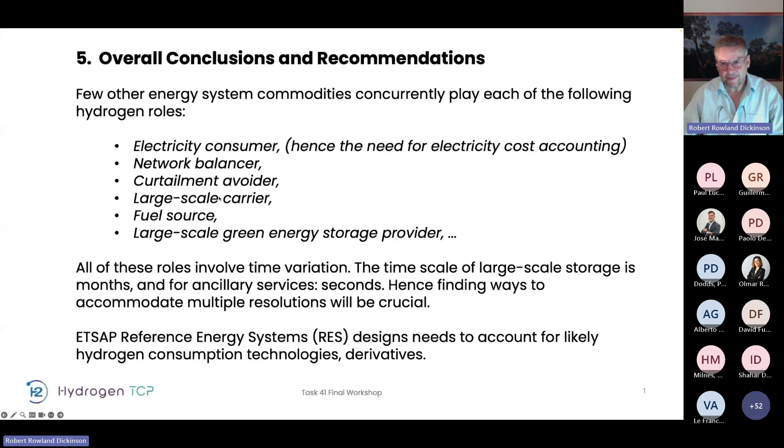So, questions please. Oh, how do I unshare? There we go. Questions for either Herib or Daria - probably not here anymore - but Paul is hopefully not gone away. Uh-oh, yes I think Paul's not here. Okay, he took off already. Yeah, everybody's pretty busy, I guess Daria rocked up and then took off. Oh Paul, there you are. Cool, Herib, are you there still? He might have gone, or anyways.